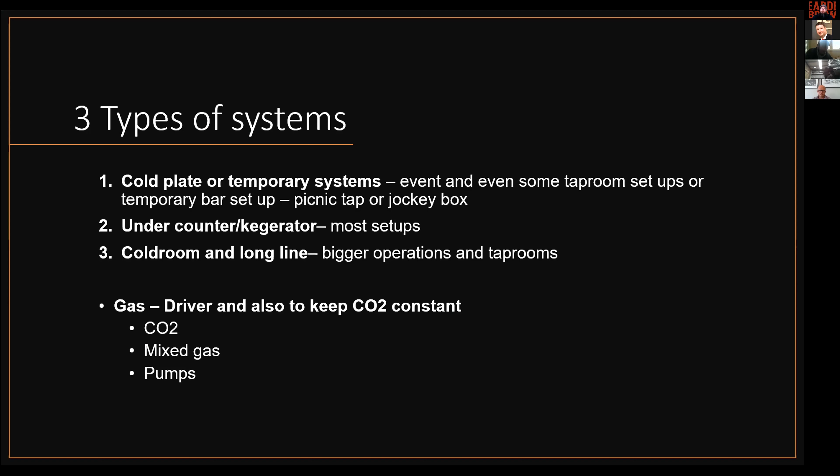So just some terms to come to terms with, right? Generally in South Africa, when people talk about CO2, they're talking about 2.5 volumes of CO2. And it's kind of a bit of an imperial kind of standard and not metric. Metric, they generally talk about grams per liter of CO2. So Europe generally refers to this. The US is volumes. We're generally volumes.

And what that means, when somebody tells you, I've got a liter of beer and it's at 2.5 volumes of CO2, that means there's 2.5 liters of CO2 in gas form that's been dissolved in the 1 liter of beer. All right. So there's a lot of gas that's in beer, and the result is that gas wants to come out of solution. All right. And setups are designed to keep that in solution and to prevent it from breaking out until it gets into the consumer's glass.

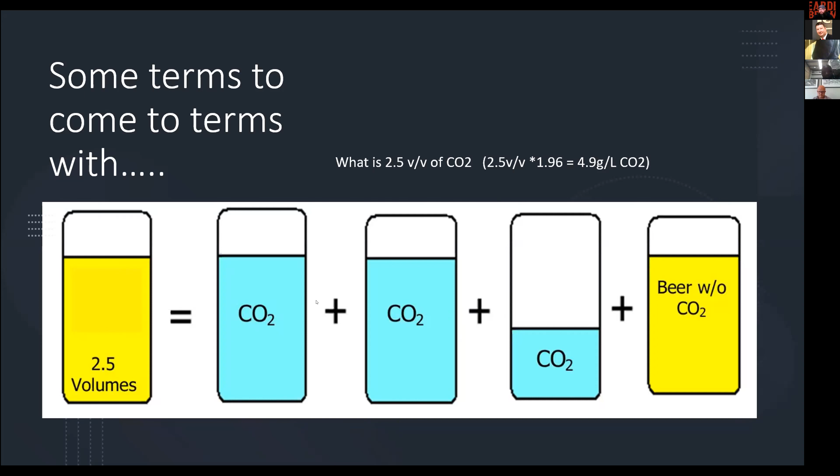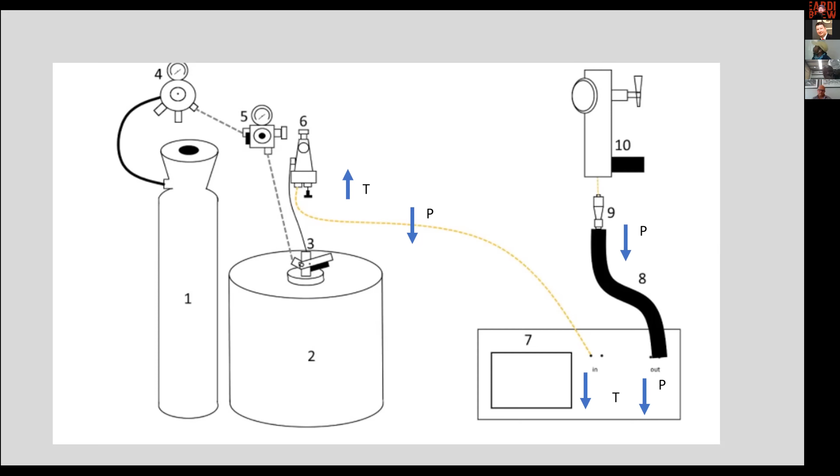So generally, I thought, because we've got quite a mixed group of people here, the brewers would have taken these things apart and they know it quite well, but maybe a few barmen don't know what the inside of the keg actually looks like. So generally, the kegs that we deal with is the G-type, but you can get the Sankey, the S, but generally most of the kegs we deal with is the G-type keg.

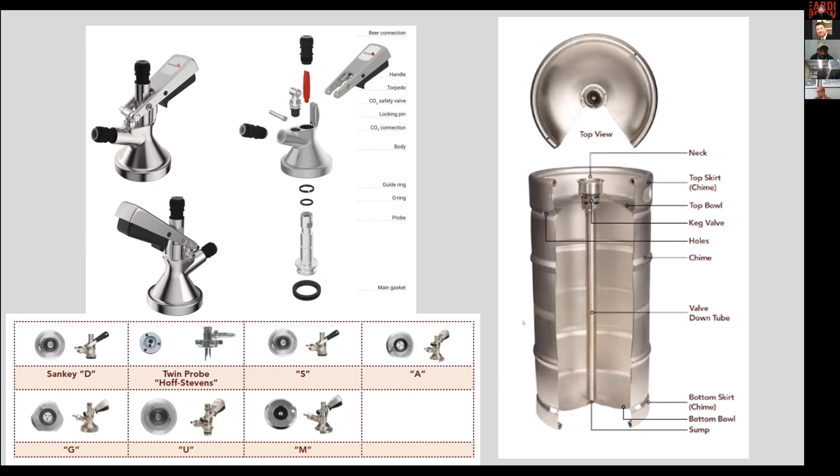So let's get into a little bit of background on what's actually happening with CO2. Why is Henry's Law important for both brewers and for barmen, or for the publican even? What you need to understand is that CO2 in beer is temperature and pressure sensitive. And that is explained by Henry's Law. Henry's Law states that at a constant temperature, the amount of gas that dissolves in a liquid is directly proportional to the partial pressure of that gas in equilibrium with the liquid.

So what that means is that if you've got the same temperature and you increase the CO2 pressure, it will result in the increase of dissolved CO2 in the liquid. In other words, if the beer has been carbonated and it's in equilibrium at a specific temperature and pressure, only a set amount of CO2 can dissolve in that liquid. And if the temperature and pressure is kept the same, no more CO2 can get into the liquid, no more CO2 can get out. It's in equilibrium.

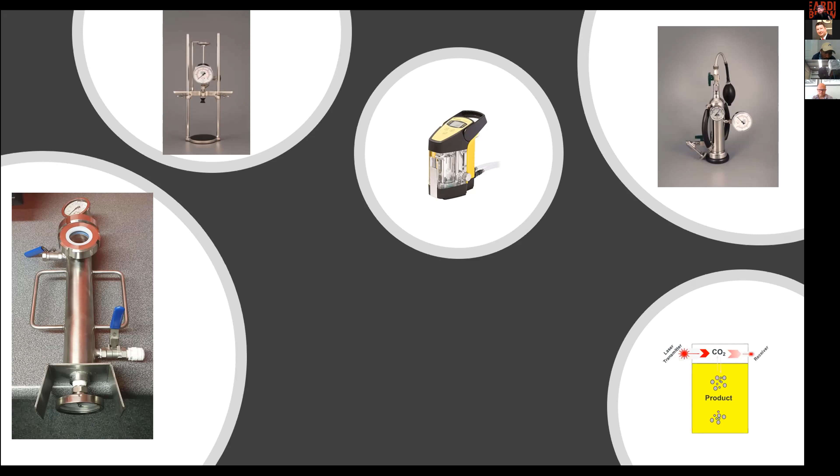And essentially what it does is, if you're taking a sample, it forces the equilibrium so you can then read the temperature and pressure. There's a specific way that you analyze it. And that's very important for how much CO2 you've actually got in a liquid and how that impacts how you're going to dispense it in your draft beer.

Okay. So Henry is our pal because the law doesn't change. Henry's law doesn't change. So if you have the liquid at an equilibrium and you know what the temperature and pressure is, you can read off what the actual CO2 level is going to be in that liquid. So for a brewer, if you know the temperature and pressure that you're going to be fermenting at, and you know how much CO2 you want, you can go read off the chart and say, okay, at 15 degrees Celsius, I must set it at 1.5 bar, as an example. And then my spunding will achieve the amount of CO2 that I require.

Henry's law also, if you do any CO2 adjustments, as long as it's in equilibrium and you can read off the temperature and pressure, you can determine what the CO2 level is. Henry's law also helps the barman, because he gets a keg with a known amount of CO2, so we're assuming here the brewer is giving it to him at a specific pressure, for the environment that he's dispensing it from.

So if the keg is now at 4 degrees Celsius, and he's going to be keeping that keg at 4 degrees, and he knows that the amount of CO2 that's in there is 2.4, he can go and read off what pressure he needs to apply to the keg to keep that CO2 in solution so it doesn't break out and create foaming through the system.

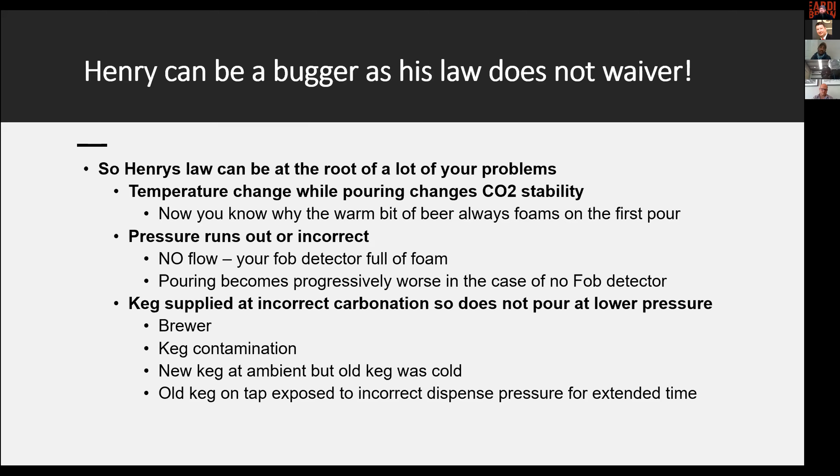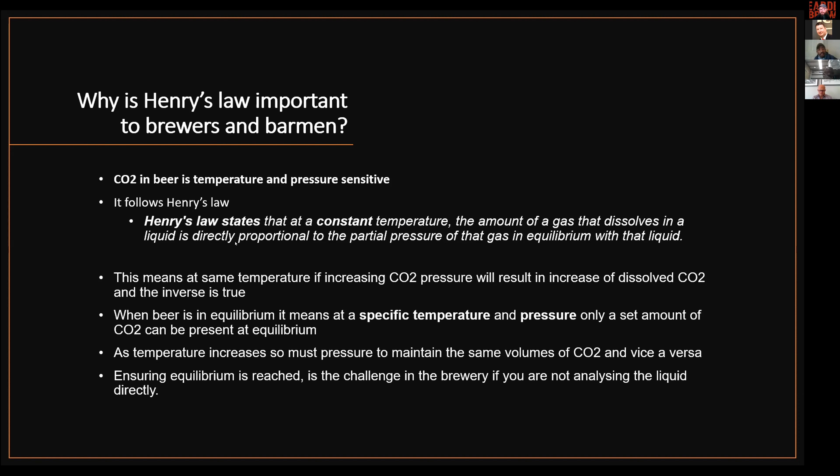So that means the actual impact of CO2 pressure on the liquid is roughly only about 1.2 bar. That's not going to change the CO2 volume. So even though this is at 2.27, the beer is actually only experiencing roughly about 1.2 bar of CO2 pressure, which is not going to change the CO2 level in the beer, thereby allowing you to use higher pressures to dispense beer without it affecting the draft dispense.

Now, I think generally for most small breweries and tap rooms, they use CO2 dispense gas, and this rule will work. But if you're using a cold room that's far away and you've got to push that beer all the way to the front taps, then typically consider mixed gas. And the reason why mixed gas works is that you can increase pressure, but because there's a smaller portion of CO2, there's a smaller impact on CO2 dissolving in the liquid.

So that's the McDantim app. You can download it if you want to see.

So for brewers, after a beer has been kegged and it's been standing for a few days, you can use Henry's Law as well to actually see what's the actual CO2 in your keg, all right? Because there's almost no headspace in a full keg, as long as you know what the temperature is of the beer in the keg. So maybe a glass of water in the cold room with a thermometer in it overnight.

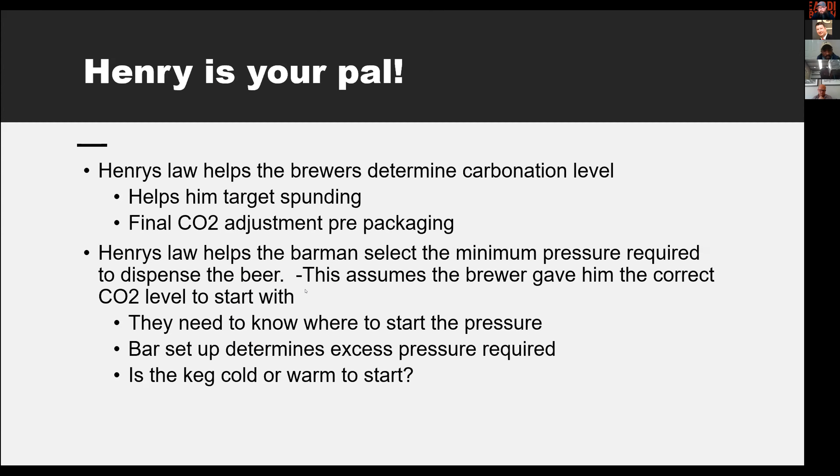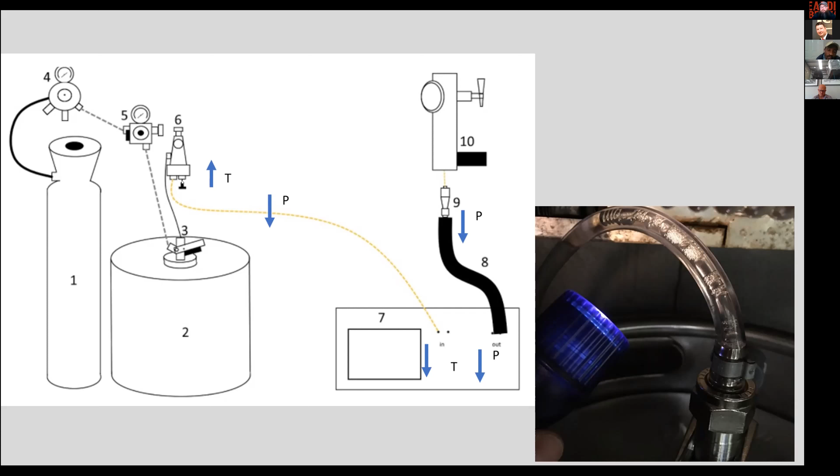And even if the temperature can cure all your ills, if the CO2 has come out here in bubbles, you're buggered. It's not going to go back in. And as it goes through here, it collects more and more CO2 out of the solution. And by the time it gets here, it's just going to come out as foam or very, very foamy beer. But because this keg is warmer, sitting at 21C, to keep 2.4 volumes of CO2 in solution, you can go a higher pressure.

Now, I wouldn't go above 3 bar. So if you've got keg troubles, say, I'm going to up my pressure by 0.2 bar, pour a pint, see is it getting better? No, it's not, up another 0.2 bar. I think once you get to 3 bar, you've got a safety limit that you need to consider. I wouldn't go above that. So if you need 3 bar to dispense the beer and it's still foaming and still breaking out as it's coming out of the keg, you unfortunately probably need to degas the keg a bit.

So what you need to do is you need to drop the pressure in the keg. So take the keg off the system. All right, let's go here. You can take it off the system, close all these valves, drop all the pressure, the temperature, so let's say it's 21 degrees C, and then you shake the keg.

And what you are doing is you are reforming a new equilibrium. Because right now, when you shake the keg, that CO2 cannot stay in solution. It comes out, it goes into the headspace, and you'll see the pressure will actually start increasing as you're shaking it. Because you can shake it and it will keep releasing CO2 until it gets to its new equilibrium point.

All right. Once you've shaken it and you've released the pressure, and you can shake it until it doesn't release any more pressure above 2.27 in this example. Sorry, that's the wrong example. If the keg temperature is still 21 degrees C, you keep shaking it and it releases pressure up to 3 bar, and you keep releasing pressure. And then you keep shaking it and it doesn't go above that, you know you've reached the equilibrium point again.

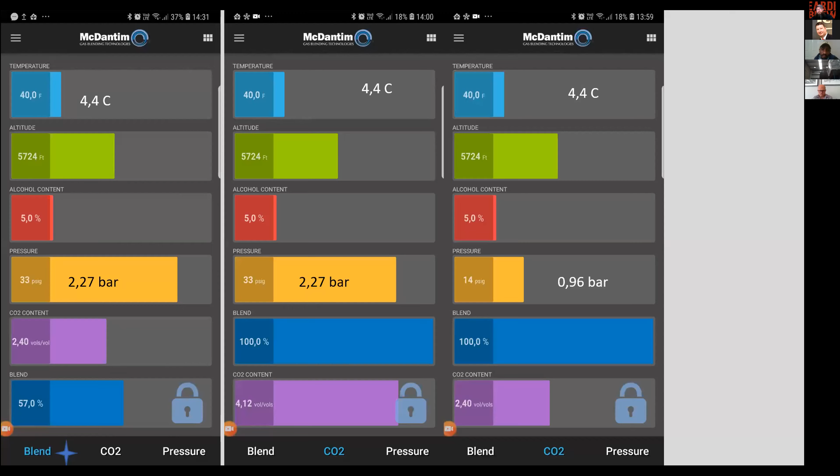And then what I would recommend is you take the keg off, let it stand for a day, maybe shake the keg, and then tomorrow you take your little pressure sensor, this one, you put it on, you know what the temperature of the beer is, you'll read the pressure that it gives you, because even if you put the keg in there at 3 bar, overnight it will absorb that CO2, and it'll only absorb that CO2 up to the point where it's reached equilibrium. And then you can say, okay, this is the value that I've got.

So that's the problem with in-keg carbonation, is because your headspace is so small, it's very difficult to do it. For my home system, I actually have an old exercise shaker machine that I've converted. So I strap the keg onto that and I set it to 20 minutes. I set my pressure to what I've worked it out to be. And I carb at 16 degrees, doesn't matter. I just know that I've got to set the pressure at this, and then I let it run for 20 minutes. And then it's carbed to the right level. Because once it gets to the temperature and the pressure that CO2 can carry, it will not dissolve anymore.

Another one here. Does transportation of kegs from one place to another have impact on the change of CO2 levels? If the keg is full, there's no headspace for the CO2 to go into. So the keg is sealed. It will not change the amount of CO2 that's dissolved in the liquid. But the CO2 has now been agitated in this keg. So if you take it off and put it on immediately, you potentially will have to put a little bit more pressure on there to just stabilize that CO2 coming out.

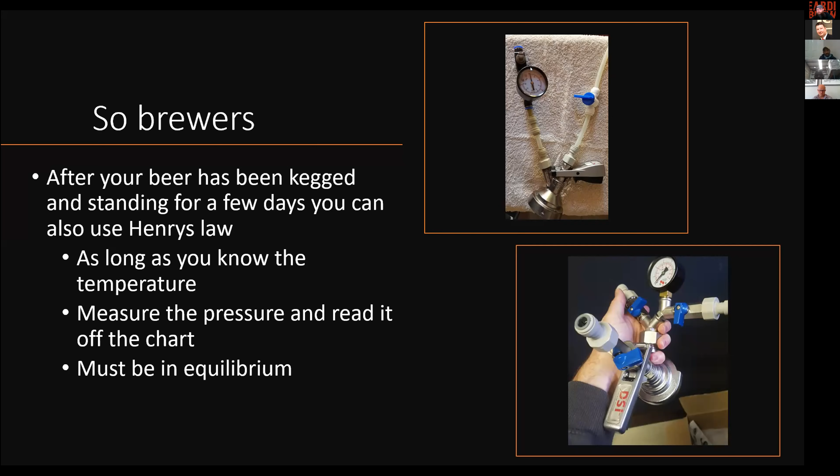If you go to events, before you actually leave the event, use that little tool. Roughly at this temperature, when I dispense, I dispense at say 2.5 bar, because I don't want any issues with anyone pouring it. And then at the end of the evening, before I disconnect all the kegs, I take my unit out and, okay, so roughly at 4 degrees it's dispensing, set the pressure all the way back to 0.8 bar, release it, put it back in the cold room, and tomorrow it hasn't had the chance to absorb that CO2 that's in the headspace. Does that answer the question?

Perfect, thanks, Danie.

So yeah, physical inline obstruction. I've seen this a few times, and I don't think it's a major issue for craft brewers. But if you're using a plastic cap that goes over the top of the keg, that anti-tamper thing, sometimes when the barman pulls it off, a little plastic piece breaks off from the safety clips. And if the guy doesn't see it and he puts the coupler on and it gets sucked into the coupler, that little plastic can't go past the little ball or torpedo, and it gets stuck there. As the beer comes out, it's agitated through that process and it breaks out. It doesn't matter what you do with the pressure then, it gives you issues.

So sometimes if you've changed the pressures and nothing changed, take the coupler off, have a look inside. Is the ball loose inside? Is everything okay? I've seen kitchens that have got chips and you name it all over the kegs, and it looks rough. If that coupler sealing surface hasn't been cleaned properly, something can get stuck in there. So I have seen physical inline obstructions.

Beer line that's dirty. Over time, beer stone gets formed in the beer lines, and it creates nucleation points where, if you're just slightly off on Henry's law, you know, you're getting close to the point where it's sensitive, it will actually form a nucleation point. Like if you think about in your glass, the guys that etch the glass at the bottom, like Castle Lager and all these guys do the etching in the bottom of the glass. You actually have CO2 breaking out constantly from that.

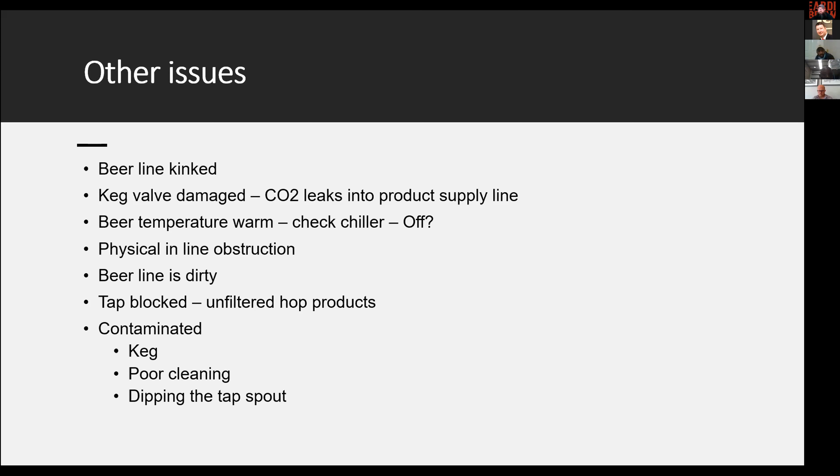Then, one of my big issues, and the guys that are on Hopaholics know, it's one of my pet peeves, all right? Clean glasses. So let's assume you've spent all this money to put in mixed gas, you've got state-of-the-art chilling, the brewer's done his job correctly, and it's pouring perfectly in a pint. Why do you serve it in a dirty glass?

If you're going to serve beer in a beer glass, remember that liquid is supersaturated with CO2, right? You've now pushed it through a tap that's poured it carefully so that minimal CO2 escapes. That's why you have foam on top. There is CO2 that's escaping, all right? That CO2 wants to get out all the time.

And if the glass is dirty, it's going to do two things. The CO2 is going to stick on the side of the glass, on the dirt, or you're going to affect the foam head that's going to form in here. And there's nothing as good as a clean glass that is brilliant with the beer that's in it, and a nice, thick, fluffy foam head on top there. And you think, oh, yeah, this doesn't happen often. Listen, it happens a lot.

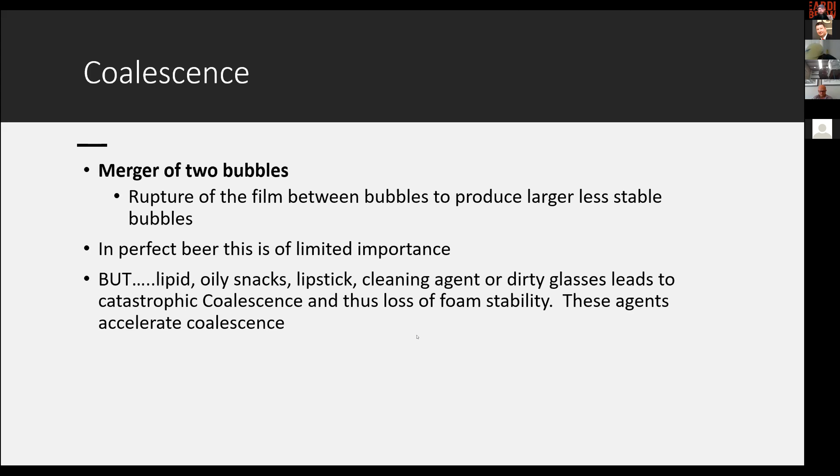But if a glass has got some lipids in it, oily snacks, if the client has been eating chips or oily snacks, that's his problem. But when it gets to the table and somebody else's oily snacks from the previous use are still on there, that's a problem. Cleaning agent, dirty glasses lead to what they call catastrophic coalescence, and thus the loss of foam stability.

So when it's been poured, you can pour it with a perfect head, but almost immediately you see this happening, where the foam head falls away and you get these huge, big bubbles. It's not a uniform shape, right? And the only way to get rid of that is to use a glass washer. If you are a smaller brewery, invest in one of these things.

If you're gonna let the glass dry, put it on a drying rack. Don't put it straight onto a rubber surface or a metal surface that seals it. Otherwise, you're gonna get this steaming effect or condensation effect in the glass. You've got to raise the glass, dry it with air, but don't wipe it dry on the inside.

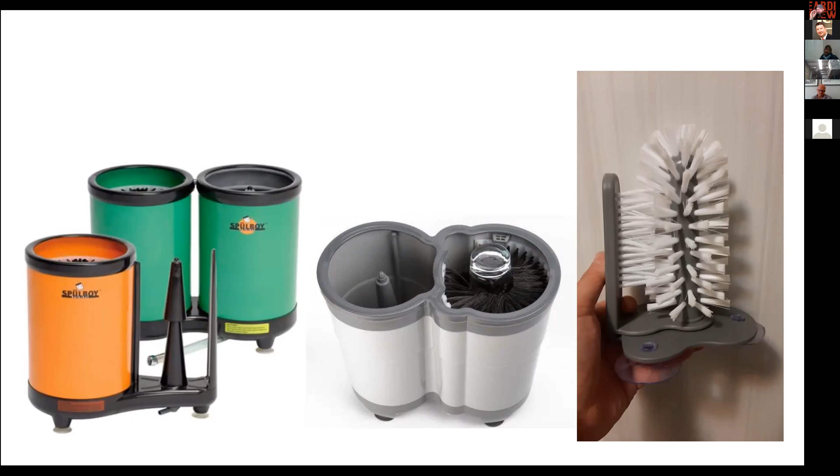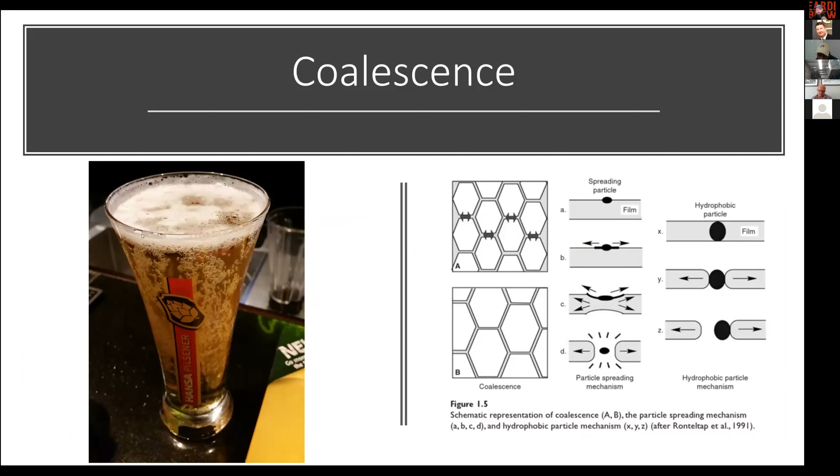Let's quickly look at cleaning. Some of the first things: obviously you're going to be working with caustic or cleaning material, so use rubber gloves, eye protection, and CIP in progress signs. There was a big court case in the US where the guys were busy cleaning the kegs at the back. The barman came in and somebody asked for a beer. He didn't know the guy cleaning the lines was at the back.

He'd connected up the keg cleaner, and so this barman poured a mixture of beer and caustic and gave it to the client. The client swigged it down and got chemical burns. So when you're CIPing the system, mark it off. Don't just tell the barman, because they swap over. If you only have one barman, yes, you can probably do it. Put glasses on the system or whatever. Take note of that as a risk for CIP.

Minimum cleaning for a keg line is two-weekly. However, if you do unfiltered beer, stuff with high loads like IPAs, you probably need to do it more often. But with filtered beer you can probably get away with two-weekly minimum. There's no reason to go longer. Caustic, strong, 2 to 3%. Basic rules: flush out the beer with water, push the caustic for initial clean. When you put the caustic through, you get that initial yellow brownish liquid coming out, and then it's clear. Clean and dismantle the taps.